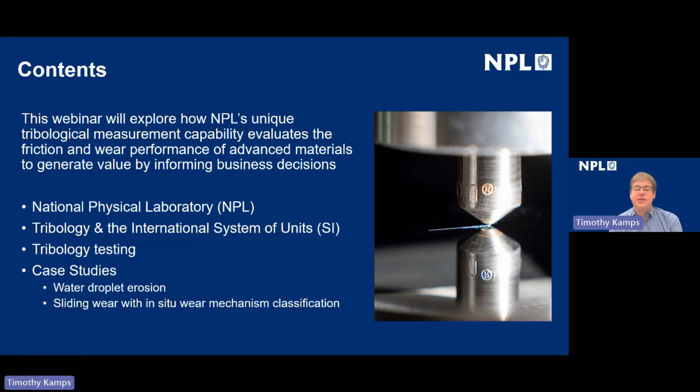So the National Physical Laboratory is the UK's national metrology institute and was founded in 1900. It's a public corporation owned by the Department for Science, Innovation and Technology, and the main site is based in Teddington in West London, with other locations in Strathclyde, Surrey, Cambridge, Huddersfield and Solihull. The strategic partners include the Department for Science, Innovation and Technology, the University of Surrey and the University of Strathclyde, and there are over 800 scientists with a breadth and depth of metrology expertise working at these sites.

So I look after NPL's tribology measurement capability, and tribology is the quantification of friction and wear to evaluate performance, but also to assure lifetime of tribological components. When we think about evaluating performance, we're looking at the efficiency of surfaces that are experiencing relative motion. And when we're thinking about assuring lifetime, we're looking at whether or not those parts are going to meet the guaranteed lifetime of the product.

Tribology really is a systems engineering discipline that looks at application-based solutions for complex systems, and that's substantiated by measurement science. So the three main areas of tribology are friction, wear, and lubrication. And inside each of these areas, there are different classifications of mechanism and different types of lubrication that can occur. On the right-hand side, I've got two examples of tribology testing. The top right is a solid particle erosion experiment, and at the bottom right, we've got water droplet erosion.

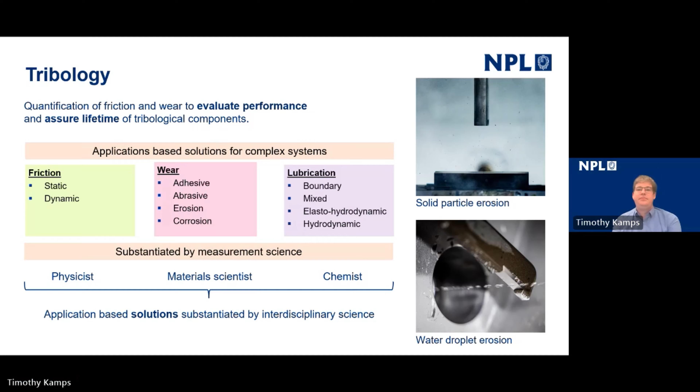As I mentioned earlier, NPL is the National Metrology Institute for the UK, and it's interesting to think about how tribological measurements map onto the International System of Units, the SI. If we consider a sliding contact, such as the one that would be produced by the equipment on the right-hand side, this is a reciprocating sliding tribometer where the sample held in the upper part is moved and the sample at the bottom is held stationary.

We might think about the measurements we can make to evaluate the damage that's occurring due to sliding. The first might be mass loss, to measure the mass before and after the experiment and see how much material is removed. In contacts that are operating in ultra mild and mild wear, this mass loss can be very small, particularly in relation to the mass of the overall sample. In these situations, measuring mass loss can be quite a difficult thing to do with suitable precision to actually achieve differentiation.

And in these instances, scientists will be interested in measuring topographical changes occurring on the sample surfaces. This might be change in roughness or specific bearing area parameters that define functional properties of the surface. We measure those dimensional changes using instruments that realize the meter. Both of these changes that we're measuring occur at a rate, and so we think about the unit of time and measuring rate of change in the second.

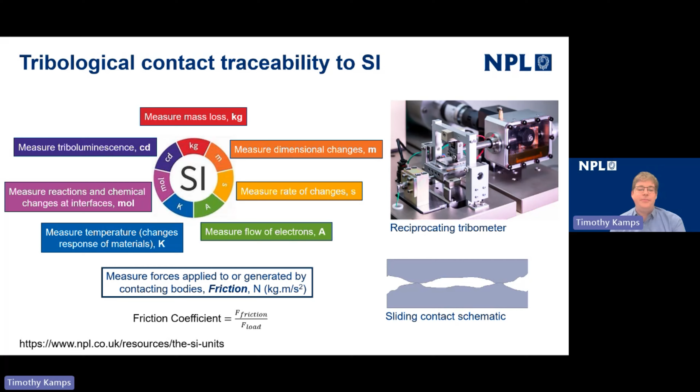It's interesting to pause and think that actually when we're measuring forces applied on tribological contacting surfaces, we're measuring them as a force, as newtons, and in the SI that's kilogram meter per second squared. More information about the SI can be found at the link at the bottom left of the slide.

So before we think about designing a tribology experiment, we have to understand what the motivation of doing that is. And it's mostly to answer this question: can I have any confidence that laboratory tests will correlate with real-world service performance?

There are three steps that we take to ensure that what we do in the laboratory can be read across into the operating environment. The first is to actually understand how the surfaces that are experiencing relative motion interact with each other, so this is analysing the complex assembly. Quite often there may be secondary motions occurring superimposed on top of the primary motion, and these may actually be the cause of the failure or unexpected lifetime of a component.

The second part is to identify the rate-limiting interfacial interaction. When we look at this, we're looking at the condition where the power we're dissipating in that contact is beyond the wear mechanism that we're expecting it to operate in, such as the transition from mild abrasive wear to adhesive wear.

The third step is the design of the laboratory experiment to make sure that we're producing the same wear mechanism and failure modes as seen in service. Sometimes the equipment we use in the lab doesn't look like it's replicating the environment seen in service. However, careful consideration is taken to match the contact kinematics and dissipated power to produce the same wear mechanism.

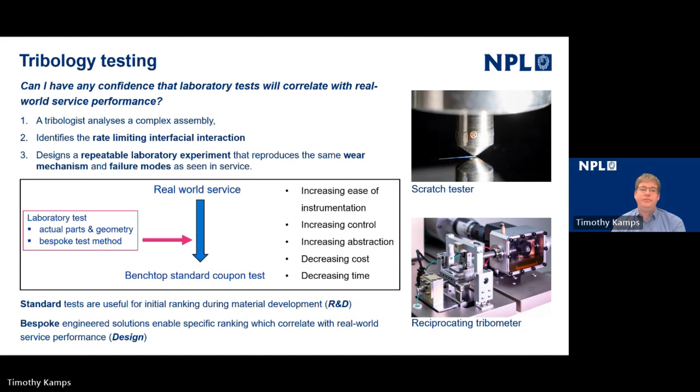Frequently with friction tests, the objective is to produce mild or ultra-mild wear, and in doing this, produce data for numerical models that allow friction loss and efficiency calculations.

When we look at wear tests, where we're looking to assure lifetime, what we're doing is moving a contact to the maximum power that can be dissipated while the wear mechanism is representative of that of the normal operating condition—i.e. the maximum wear rate without transitioning to a different wear mechanism.

This is quite a challenging experiment to do because there can be cumulative effects, heat dissipation in the contact that can have quite a long time base to them. So sometimes unexpected failures occur due to wear tests that have been artificially accelerated above the threshold at which they exhibit the same failure mode.

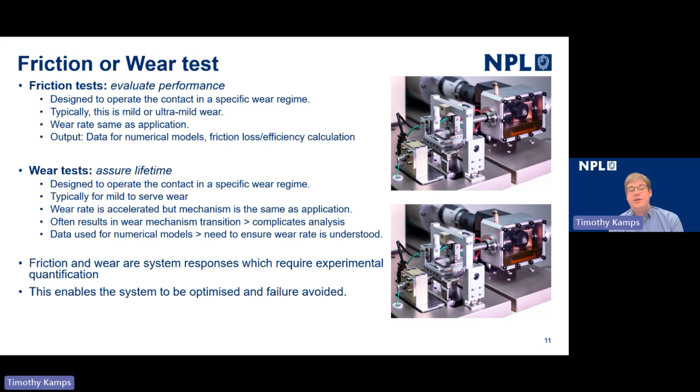Because wear tests often look at bistable systems where a contact may be operating in a steady state, it's important to understand the operation conditions of the contacts that allow successful operations in the wear mechanism for which it's been designed. Friction and wear are system responses which require experimental quantification, and this enables systems to be optimized and failure to be avoided.

A word here about standard and bespoke wear test methods. It's very useful to use standard tests when we need to compare data to previous data obtained under the same conditions, and also when we need to establish credibility of results in terms of adherence to consensus practices or specifications. This is particularly the case if the purpose of the test is to validate a new coating or lubricant solution. If the standard meets the purpose of the wear test and simulates the end application correctly, then it's really good to use a standard test method.

However, standard test methods can't be used if the application conditions differ significantly from the standard, as often the ranking of materials will differ from that seen in service. It's really important that if the test method, even if it seems appropriate, doesn't produce the kind of wear or surface damage seen in service, then it probably isn't the right method to evaluate the material.

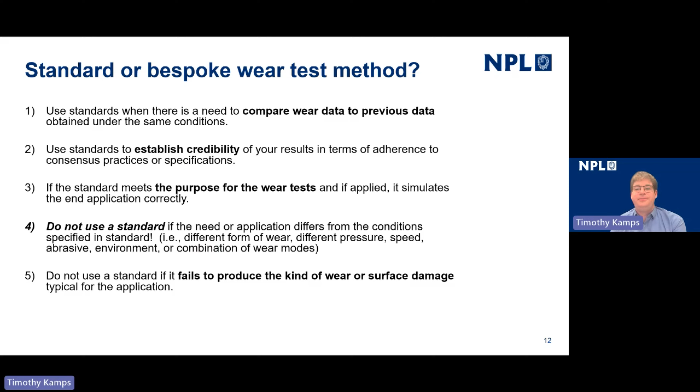So, some examples of when we might use a standard test against a bespoke test. If we're looking to screen friction and wear performance of new products, we might use a standard test in a coupon level or benchtop apparatus. If we're looking at a specific friction and wear application, then we'll use a bespoke test at coupon level.

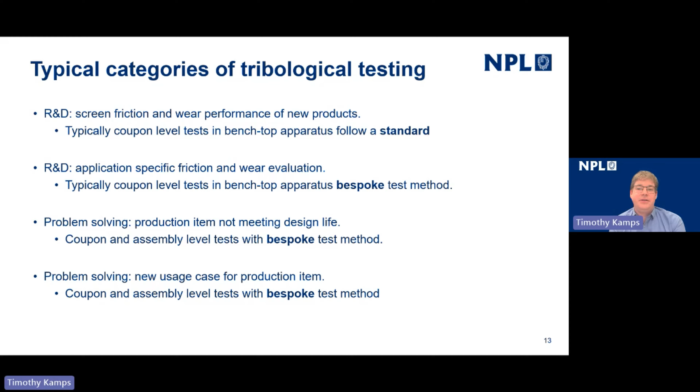If we've got a production item that's not meeting the design life, then we'll again use a bespoke test method. And the same again if we've got a production item that we want to use in a new usage case, perhaps in a different environment with a different process fluid, or experiencing different vibration inputs.

As I said before, at NPL we look at using bespoke test methods, using coupons or real parts and subassembly testing. We have a particular focus on in situ friction and wear measurements for high value testing - I'll talk more about this later. Essentially, what we're looking to do is reduce the number of physical tests while increasing the amount of understanding around the wear mechanisms.

The tribology research at NPL sits inside the Advanced Engineering Materials Group, and we're fortunate to be able to collaborate with scientists across the group to provide us with analysis of worn surfaces - our surface technology group, which can provide surface analytical techniques, and our dimensional metrology group, which supports us with surface topography characterization.

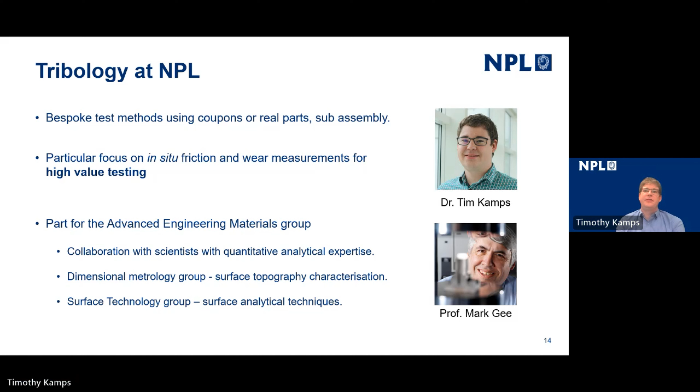So I've got two case studies now to look at how the advanced test methodologies that we've developed at NPL can add value by informing business decisions and design decisions around material selection for solving tribological challenges.

This first case study is looking at water droplet erosion, and in this particular case we'd be looking at gas turbines, but equally the test apparatus we're looking at is suitable for wind turbines.

Here I've got a picture of two different wind farms, one in the Netherlands and one in Scotland, one looking slightly sunnier than the other. Water droplet erosion is a big problem for wind turbines on the leading edge. Tip speeds can exceed 90 meters a second, and the environments in which wind turbines operate often mean they experience quite a lot of rainfall.

The cumulative damage of water droplets on the surface of these blades has a really big detrimental effect on the efficiency of the turbine, but can also result in catastrophic mechanical failure of the blades.

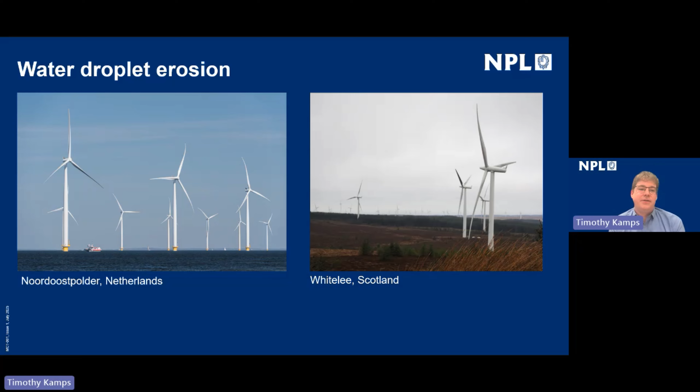On this side, we can see the different environments in which water droplet erosion might be causing damage - steam turbines, gas turbines, wind turbines, nuclear power plants, aircraft engines, and leading edge of airfoil surfaces. You can see there's a variety of speeds that can be run at, and also a variety of droplet sizes in the different environmental conditions.

And the mechanism of damage of water droplet erosion is laid out on the right-hand side. We've got deformation caused by the droplet impacts, and stress and shock waves that reflect through the material, resulting in fatigue. Then as the droplet collapses, the water jets out sideways, called lateral jetting. This can have a big impact on how materials wear if they have surface topography of an order which will interfere with the lateral jetting.

And for some materials, mechanical recovery - so viscoelastic materials - it's important to consider what the impact rate is and whether the material can elastically recover in between impacts.

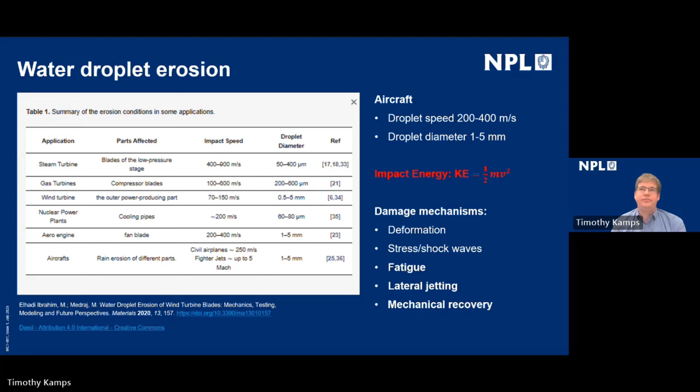So this is the water droplet erosion test system at the National Physical Laboratory. It's a horizontal axis rotating arm rig. You can see an image of it in the center of the slide. This arm takes a sample at each end, so it tests two balanced samples at any time, and it rotates clockwise.

As the arm rotates, it passes a jet of single droplets, which are traveling into the chamber. The chamber is evacuated to allow us to achieve high speeds of up to 500 meters a second. We can achieve different droplet sizes by varying the needle from which the water droplets emerge, and we can achieve droplets from about 300 microns up to 2 millimeters in diameter.

For every test that we run, we characterize the droplet stream using a technique called particle image velocimetry. We do this so that we can work out what the impact energy is, and with the impact rate, work out what the dissipated energy into the contact has been. In the center of the slide at the bottom, we can see a histogram of diameters against count for a particular nozzle, and the sort of image that we analyze in order to produce this is shown on the left-hand side.

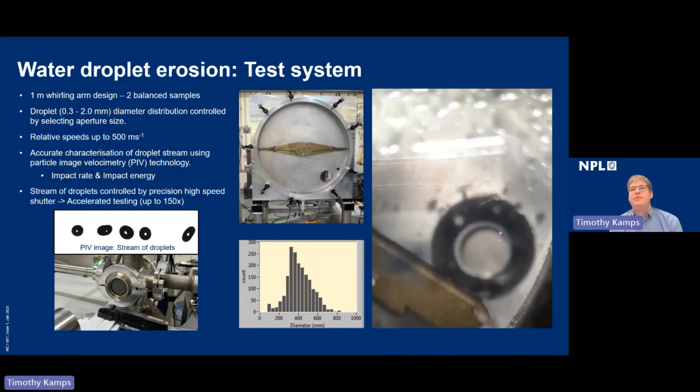Because our rig is a rotating arm rig, it offers the ability to accelerate the testing of samples by up to 150 times. Because of this, if we want to test in quite mild conditions, we need very precise timing of the droplet stream. What you can see on the right-hand side is a video of the droplet stream emerging into the test chamber and being controlled by a high speed shutter. The first time you saw it was at real speed, and the second time was at 30 times slower than real life.

So here's a still image of that water droplet stream emerging into the chamber in front of the test sample, which is the light grey rectangle in the arm in the center of the image.

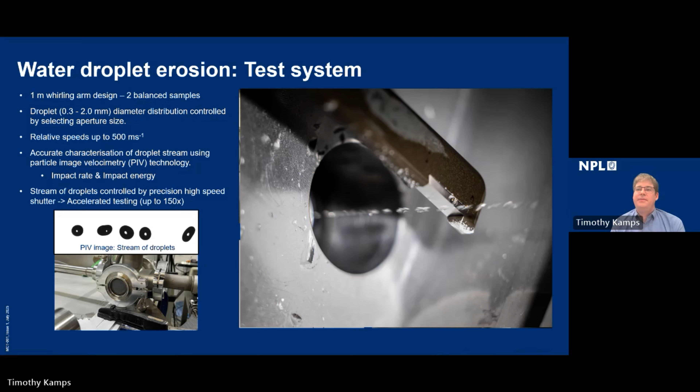Shortly after that, we reach a period of steady state condition. This mechanism, or this graph and the identification of these 3 regions, is where this test allows differentiation between different materials.

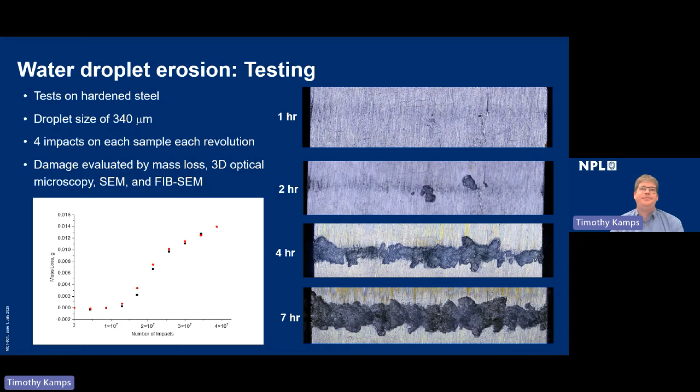But more than this, what we can see is that if we needed to make a decision based on the lifetime and the cost of maintenance, we can optimize the lifetime of the part based on these factors.

What we can see is that although the incubation period doesn't actually change very much in length, when we reach that period of maximum erosion, it does actually take a while for the smooth finish to achieve the same rate of mass loss. So in systems where it may be acceptable to have a mass loss after incubation before the part needs to be exchanged or serviced, it may be sufficient just to change the surface finish.

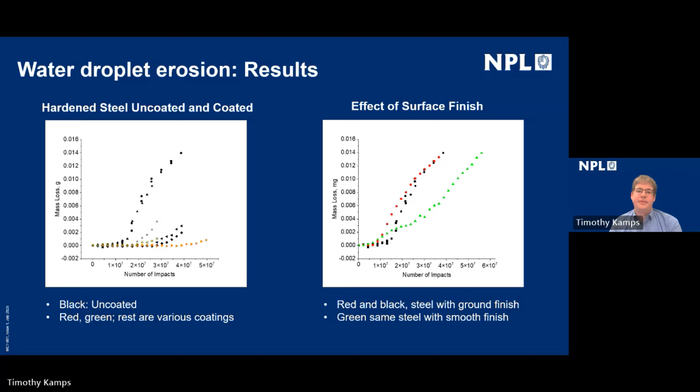Subsequent to testing, we can then look at the mechanisms occurring on the surface with different surface analytical techniques. The ones shown here are from inside the Advanced Engineering Materials group.

Here we're using 3D optical microscopy, using a focus variation 3D optical microscope to evaluate the surface topography of the area that's been subjected to water droplet erosion.

This scanning electron microscope also had the ability to use EDX, energy dispersive X-ray spectroscopy, to identify elements on the surface. In this case, we were looking at oxidation caused by the extremely high strain on the sample due to the lateral jetting as the water droplet collapses.

This is possibly quite a straightforward example, but it demonstrates the analytical capability that can be used to understand the wear mechanisms on the surface, particularly the transitions between different rates of wear once erosion has started to occur.

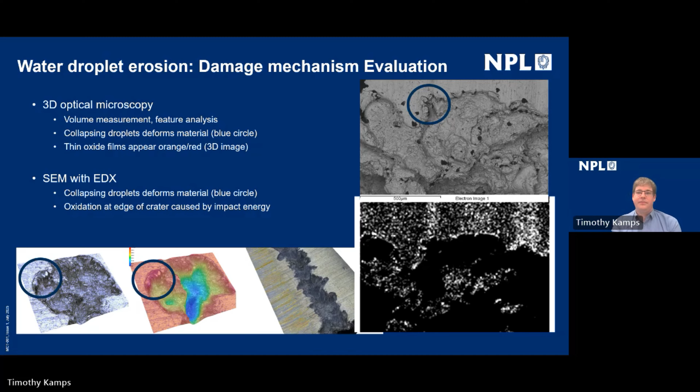The second case study looks at sliding wear, using a staple of tribology testing: a pin-on-disc machine or ball-on-disc machine. In this example, we'll look at the application of machine vision with machine learning and real-time wear mechanism classification to offer a high-value testing methodology.

The motivation for developing this capability was to reduce the amount of resource required to evaluate a new coating or lubricant, while gaining a more in-depth and detailed understanding of the wear mechanism and the transition points in the wear map for that coating or lubricant.

A conventional methodology would be to perform many tests to evaluate this performance. Of course, the validity of that test is determined by the accuracy and precision of the measurement of friction and wear, and also sliding speed and applied load, highlighting that the test methods need good traceability back to the SI.

An R&D program to evaluate a coating system or lubricant is conventionally very expensive and time-consuming. To reduce the number of tests...

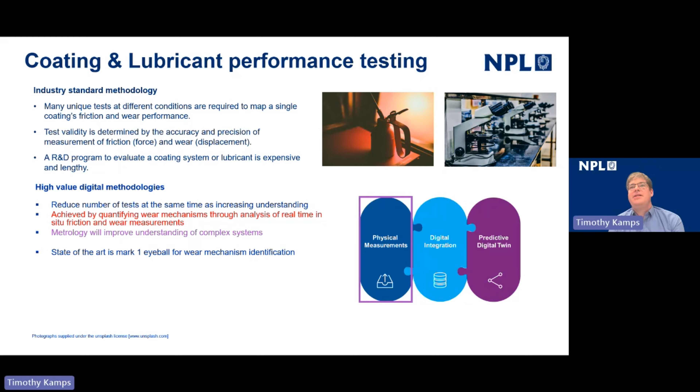This is achieved by quantifying wear mechanisms through analysis of real-time in situ friction and wear measurements.

Eventually, we look at a wear scar on the surface under an optical microscope, and experienced scientists will classify the wear mechanisms going on during the experiment and make inferences on quite long time bases.

We're looking at friction signals, so it may involve looking at the characteristic behavior of the friction force over tens of minutes or even hours, and then looking in closer detail at highly localized transients to try and infer points in the experiment where the mechanisms changed.

Then a repeat test will be run, and the test will be stopped at a condition that meets that criteria, and the surface is evaluated to try and understand that transition.

This after-the-fact analysis is quite time consuming, but it also involves a lot of trial and error, as stopping an experiment in motion at a very precise point using analysis after the fact can be quite challenging.

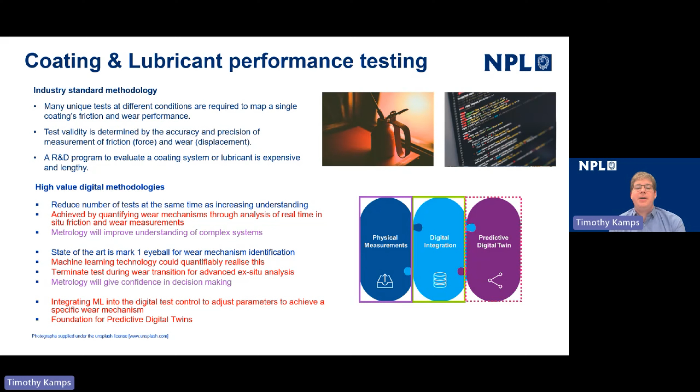The motivation here was to integrate machine learning into the digital test control such that machine vision could be used to evaluate wear mechanisms in real time. Here I've got a graphic to try and explain that.

Conventionally, once the interface has been analysed to extract the contact kinematics, we would then look to match that in the tribometer. Typical input variables might be velocity, global temperature of the contact, load, and also the surface topography of the contacts.

Then we might look to set the duration either as a cumulative energy dissipation duration, realized as a sliding distance or just as a time duration. Or we might set a limit on the threshold for friction or the threshold for wear measured in situ.

There are various techniques for this, both contact and non-contact, in 3D and 2D, for wear measurements. Then after the experiment's run, we'll look at surface topography characterization, microscopy, and also chemical analysis.

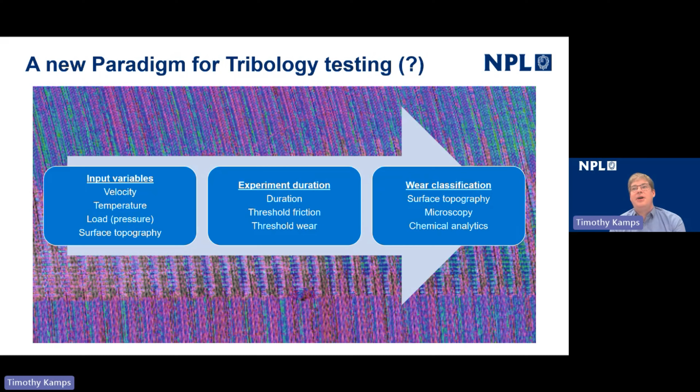But the change in the methodology says, well, actually, if we know which wear mechanism we'd like to reproduce, say a transition from abrasive wear to adhesive wear, we may be able to define or identify that change by looking at images taken by a microscope.

When we do that, essentially we can start at the other end and say to our tribometer, instead of running for a fixed duration or until a fixed friction threshold, run until you see evidence of adhesive wear occurring on the surface of the contact, and then stop the experiment.

And in this way, we can dramatically reduce the number of tests that we need to do in order to precipitate the failure mode of interest for the study.

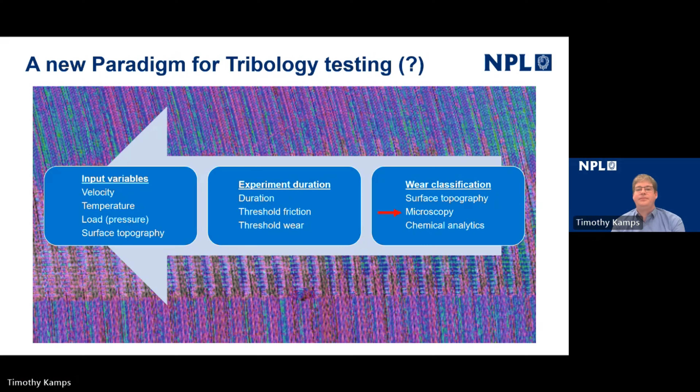We programmatically account for the refractive index of both the 3D probe, which is a multi-point chromatic aberration line scan probe, and the line scan camera, which is a light intensity camera. And we can focus this through the lubricant film and image the wear track underneath the lubricant film.

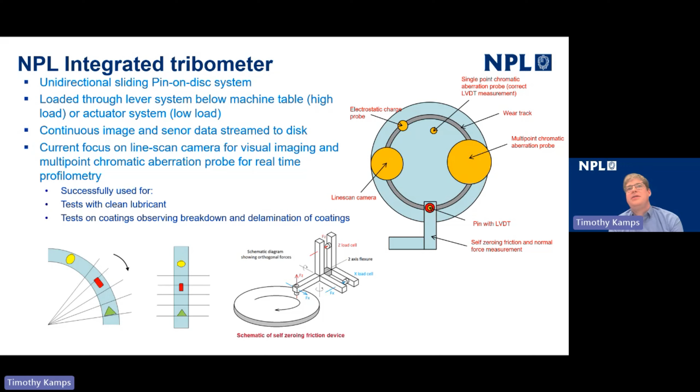So if we're looking at the formation of an oxide film, for example, we can measure that. This multi-point chromatic aberration probe has a resolution that allows us to see very thin films. We can also look at tests on coatings, observing breakdown and delamination of coatings.

So what does this look like? Well, here's a couple of photographs. In these photographs, the disc that's being tested is pink, and the ball holder is labelled there, the slightly yellowy goldy colour item. You can see the objective lenses for the two camera systems labelled on the left and the right, the line scan and the multi-point chromatic aberration probe.

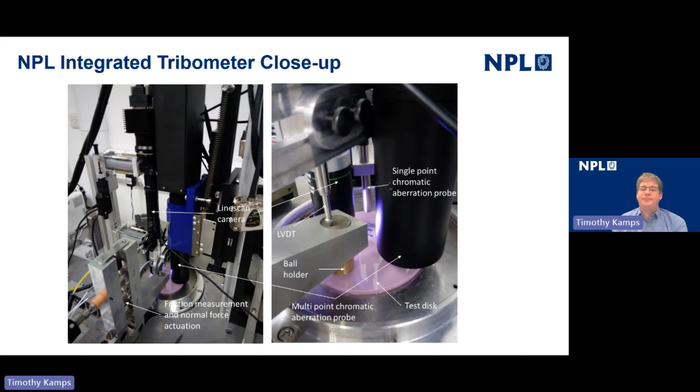So for our real-time classifier to work, we clearly had to create a library of images that had been pre-classified, showing different types of wear mechanism, so that we could train our model. The model chosen was a convolutional neural network, and we've called this classifier WM classifier, the wear mechanism classifier. We actually produced a very large data set, over 10,000 images, and the images were classified by a number of scientists into 9 different wear mechanism classifications.

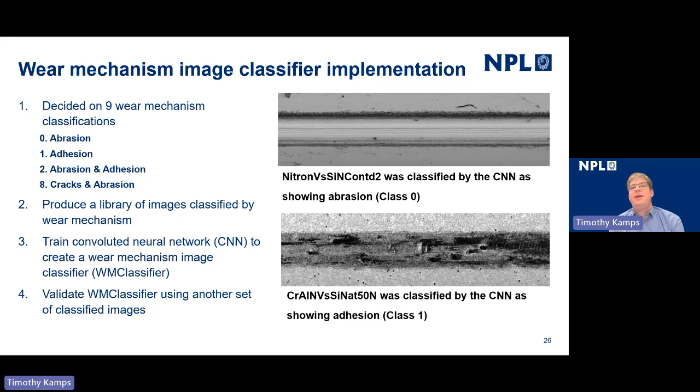In this presentation, I'll just look at 4 classifications: abrasion, adhesion, abrasion and adhesion, and cracks. On the right-hand side, you can see an example of abrasion, class 0. This was for silicon nitride coating. And at the bottom, we can see a chromium aluminium nitride coating.

So the way the system works is that as the disk rotates under the camera system, it captures an image. It does this every 5 seconds, which relates to 30 degrees of the disk rotating underneath the camera system. And then we save that image and pass it into a virtual Python environment inside Anaconda.

And then we load this, having previously loaded the neural network model into memory, and that allows us to classify the image in under half a second. With recent optimizations, we can do this in about a quarter of a second. And that then allows us to make machine actionable measurements.

So the model returns the classification of the wear mechanism. It returns the probability that the image has been classified in that class. And then it allows us to make a couple of actions based on that classification.

So, for example, we can run a load ramp test until we see the transition between 2 wear mechanisms, in this case between abrasion and adhesion. We can have a very small load increment with a time period, slide over a fixed distance, and keep asking the system to evaluate the wear mechanism. Every time we've reached the end of our time increment and we haven't seen the expected transition from abrasion to adhesion, we can increment the load, allowing a fully automated experiment where we can move around until the failure is just about to occur.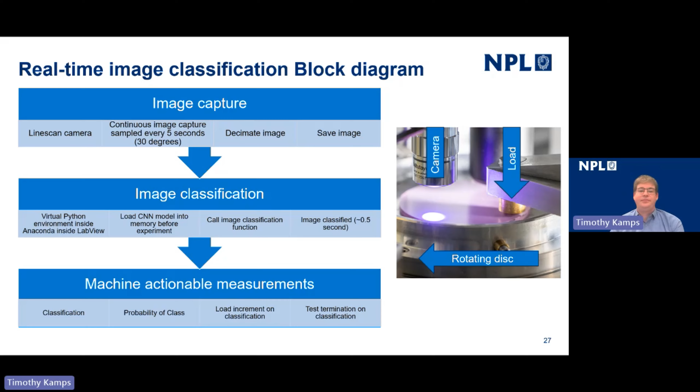This video shows a typical example of the type of information that can be obtained by the system. This is a chromium aluminium nitride coating on an ASP23 disk, having had a silicon nitride ball slid against it. Each of the images you're seeing is after each successive pass of the ball on the disk.

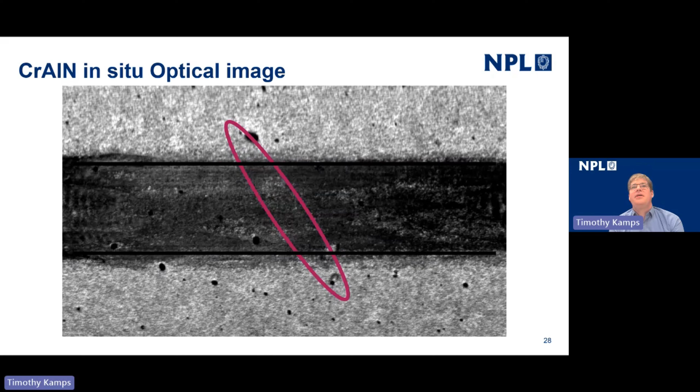Just then the coating failed. That was the bright diagonal line that formed on the surface. So as the video played, you saw the formation and removal of silicon nitride film on the surface. You can see it growing to a critical thickness, being removed from the surface, and then growing again, and the change in the wear track width as that silicon nitride ball wears a flat on the surface.

What's quite interesting to note is that once the coating fails, the recess left in the surface very quickly fills up with debris formed from the sliding contact. And when we look at the friction signal that's been spatially resolved against this, what we notice is that the transient friction signal only exists for a very short number of passes after the initial failure of the coating.

This makes it very difficult to identify using conventional temporal techniques where we're acquiring the data without any way to attribute the change in friction signal we've seen to the removal of the coating. Yet when we use a technique where we've recorded the images and the friction signal in a way that we can rewind the data and look back at it, we can actually identify this location on the disk and see that the failure has occurred there and what the friction response is.

In some cases, it may not be of interest that the coating failed in such a localized way, although it may be an indicator that it's about to wear catastrophically and give occasion to take the system offline. And in fact, that's what happened in this case. A couple of passes later, the coating began to delaminate from the ASP23 substrate and was peeled off from the surface, resulting in a very large amount of the coating becoming liberated.

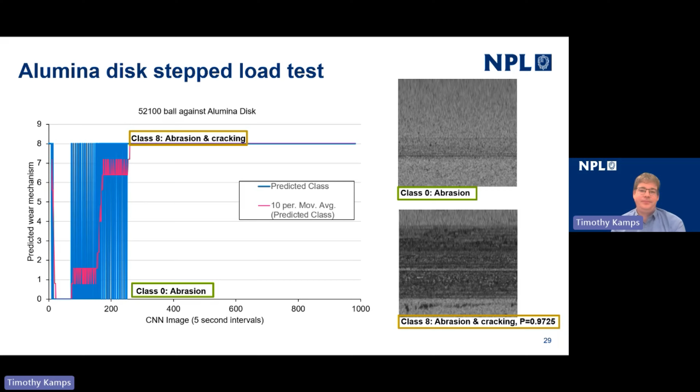One of the other sensing technologies we've integrated into this pin-on-disc test system is Raman spectroscopy. In this case, we've got two steel contacts, a 52-100 ball bearing sliding against an ASP23 disc, and what we're looking at is the formation of iron oxide in particular.

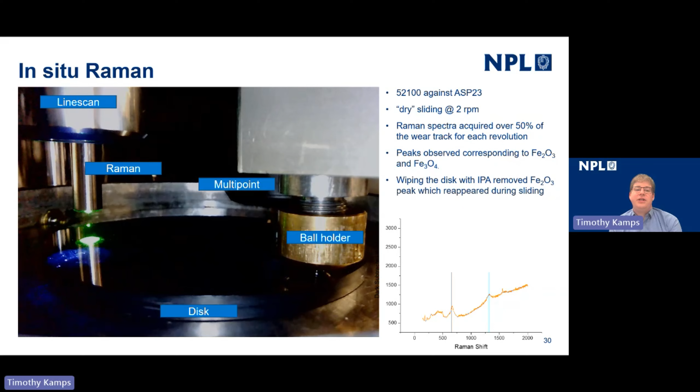We're interested in how fast it takes for the formation of the oxide film and how tenacious that oxide film was. There's a graph here at the bottom right, and what we can see is successive spectra, and you can see that actually the Fe2O3 peak reappeared after we'd removed it, really quite quickly, and then we can see the saturation of that. This is a measurement capability we're developing at the moment, understanding how the system works in real time. But there is a clear advantage to being able to identify chemical species during the sliding experiment.

And this year, this capability is being developed to work in the presence of lubricant, both the Raman and the Vision system, which has already been proven to work in submerged conditions.

Okay, so this is my last slide, the summary slide. Hopefully with these two case studies, but also with the explanation of tribology test methodology design, it's clear to see how laboratory experiments offer increased repeatability, sensitivity, and precision, which enable quantitative evaluation of tribology systems to quantify performance and assure lifetime. Quantifying performance gives us our measure of efficiency, and assuring lifetime gives us our understanding of how long the product's going to last for.

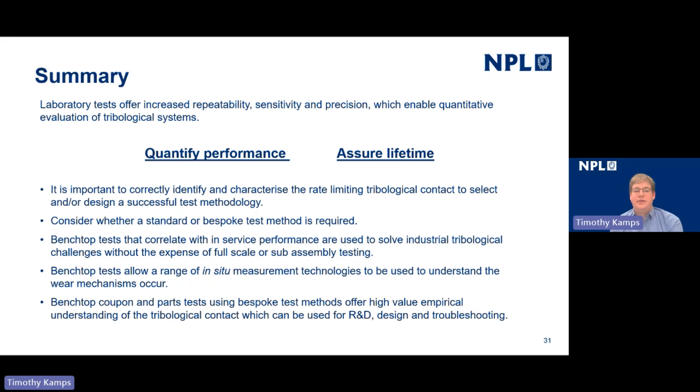There's a question here that says, I have an application where I'd like to measure sliding friction, but at a much smaller scale than the equipment shown in the presentation. Do you have suitable equipment for this? Yes, one of our tribometers, the NPL micro tribometer, sort of does what it says on the tin. It's actually a tribometer that fits inside a scanning electron microscope, and we can use various end effectors with very small radii down to 1 micron and smaller to perform sliding friction and wear tests in situ in the SEM, and this gives us the ability to take high resolution images and understand wear mechanisms in greater detail.

Another question about machine vision: could the approach you've taken be used on other equipment, such as a manufacturing environment? Yeah, so what I didn't show in this presentation was that in order to create the data set we needed, with all the metadata tags for the images to train the neural network, we created a set of software that allowed us to curate this data and allowed the scientists to efficiently add the metadata to those data sets so they could then be used to train and also validate the neural network that was developed. This system, or the software designed for this, was deliberately built so it could be used to manipulate and curate data sets coming from different machines. So as long as the equipment is capable of having an encoder fitted to get the spatial resolution, both the imaging system and the subsequent data processing for the neural network could be implemented.